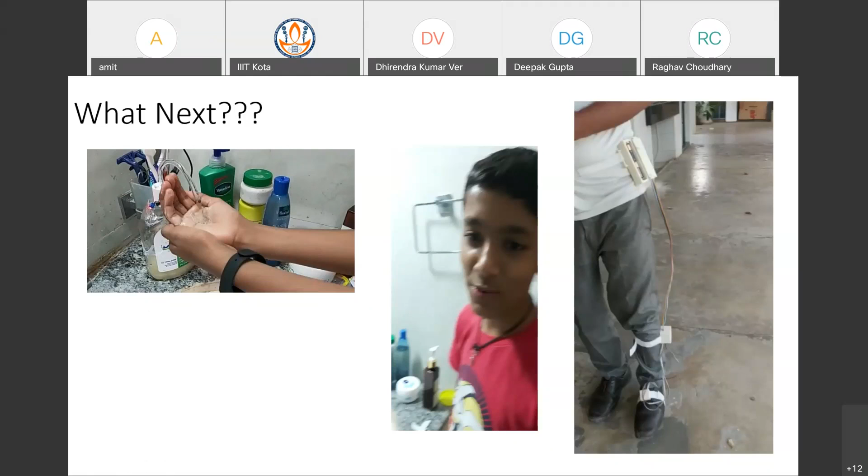The point I was trying to make is that you can see a very simple system we had been talking about, this hand-free sanitizer dispenser. Because when you press the sanitizer bottle, it itself gets contaminated as you use it. It's a very simple system, as you see in this video, done by my son. The point is that sensors and actuators range from the hobbyist level, as in this first video, to the third video you'll see, used by a person for research purposes. So how do you actually go about these sensors and actuators?

In the first video we saw, he used all simple stuff: a simple tube, a pen cap, and the sensor placed there. What it does is, as he places his hand in front of the sensor, that is the sensor, and the actuator lies inside the bottle, which is a submersible pump. So there is some form of conversion taking place, the sensor is actually detecting the distance.

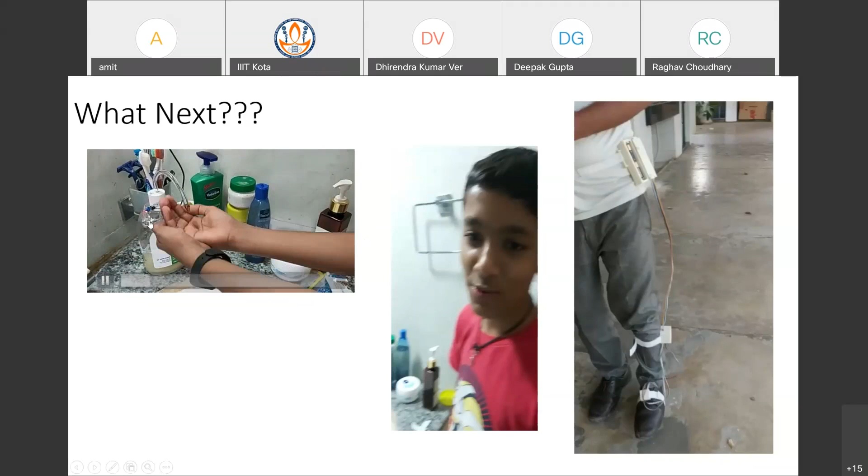So as he places his hand in front of this sensor, it's already activated. As the hand is placed in front of the sensor, it detects this and sends an electrical signal or input to the pump inside the bottle, which converts that electrical signal to an output, that is, pressure. So the electrical signal is converted to mechanical energy, and that's the pressure, and then the liquid starts getting dispensed out of it.

So this was one sensor that he tried. Then he said, of course, like my son, he is studying in 8th standard, so for his age I think that is a good amount of work. So he got interested.

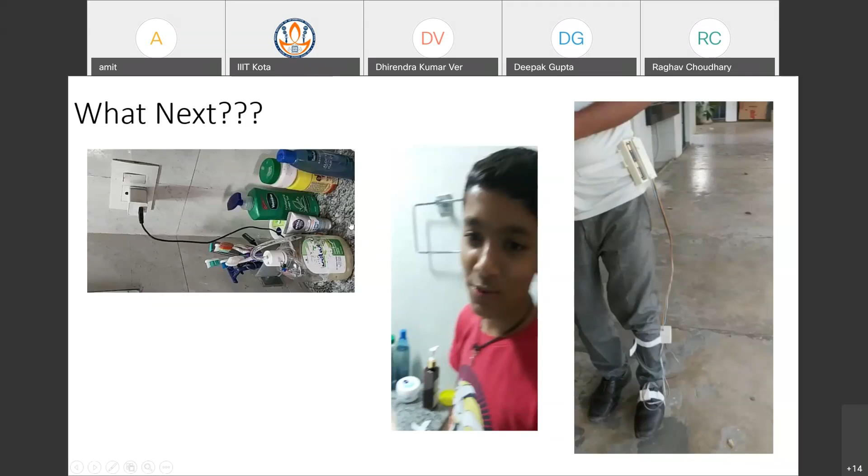He said, let me try some more sensors. So this was the second thing that he tried, and again he's using all the stuff that was placed at home. He used this Pringles bottle and a straw. Again the pump is there inside. So instead of the first sensor you saw, which was an IR sensor,

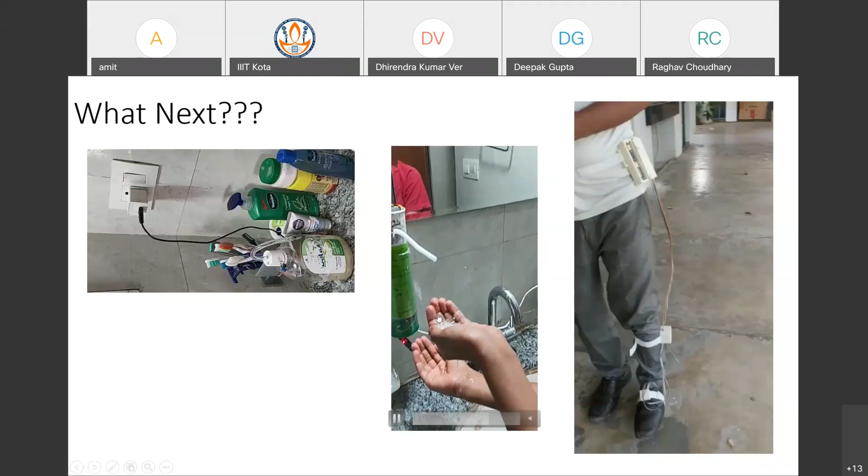here he wanted to use an ultrasonic sensor. But somehow that ultrasonic sensor, it is there with me, I can show you that kit, but that video was not available with me right now.

So you keep on trying with, when I say infrared sensor and ultrasonic sensor, what is the difference? How does it make sense? And then the other thing you have learned in this course is about the Arduino board.

Since this whole program was about LabVIEW, that means you are doing some kind of programming. Of course, these sensors you look at here, they do not use any LabVIEW or any kind of programming like this. But then, we talked about these Arduino boards. So I have one here with me.

Dr. Parikshit, I cannot see myself, what is the visual. I do not know whether what I'm showing is being displayed to everyone. Yes sir, it is getting displayed. This is the Arduino board. Now the question is, Amit sir, I think you can turn on your video also. Is it not on? I think so, start video. It's already giving me the option stop video, so video was already on. Sir, actually video is not on right now, but in my window it shows the video, I can see the camera on. Okay, stop video, and it gives connect to video system. It is just showing that yes symbol, sir. Amit co-host, oh okay, actually it was sharing screen, maybe because of that. So maybe the two things are not allowed at the same time. Maybe if you share only this. So I think it doesn't allow to have video and screen sharing both at the same time. I never tried this one, so that's why I was asking. Nevertheless, it's not very important. Shall I click on this join meeting option that comes? I don't know what, I just clicked on join meeting now. Okay, so now is my... to mobile you are joining. Sir, you have joined two times and we are hearing echoes. So just leave from one side, in which you are not the co-host. Okay fine, so better I'll just take this one now. It is coming, sir, now the camera is there and the screen is also there, both are there. Okay fine, thank you, so now I can see myself in this.

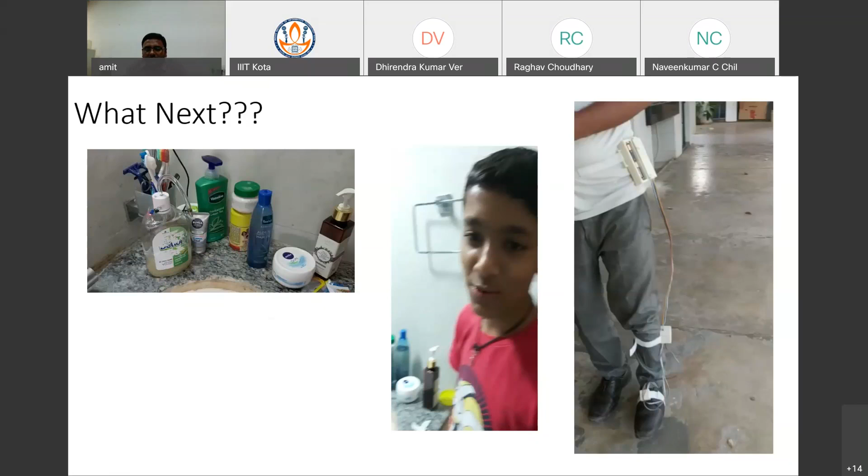I'll explain this later on. So he is Mr. Radhesham Rathore, my PhD scholar. You can see that he's walking with some kind of system latched to his leg.

And I have that system here with me. So then after that, he also had a switch, or he had made a switch for it, and these parts were 3D printed. So this is the complete system, and you can see here.

This is the sole that was placed. I'll repeat the video—so this is a sole, and in the sole we have placed some sensors. We have some sensor in this block that you see over there, and another sensor over here.

So we place a couple of sensors in this whole system, and you can see that he's getting some output on his mobile phone. This is the battery that he's using to power the whole system. He's using a Bluetooth module, and through this module, the output of the sensors is being transferred to his mobile phone.

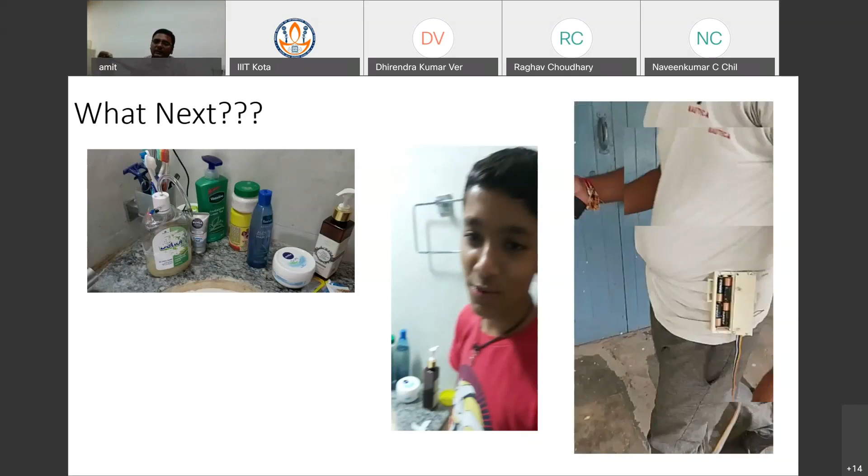So we have placed the sensor inside this - you can see it over there. These are the sensors placed inside the sole. One goal is to get the forces obtained from the ground as the person walks, since these forces are being exerted on the body.

Now if the person's gait is not proper - if he's limping from one side to the other - there would be uneven distribution of forces on the two legs. In this case it's only on one leg. Say the person's weight is around 80 kg, and you want to see what load is being distributed on one limb. So the first part is getting the forces, or the distribution of forces.

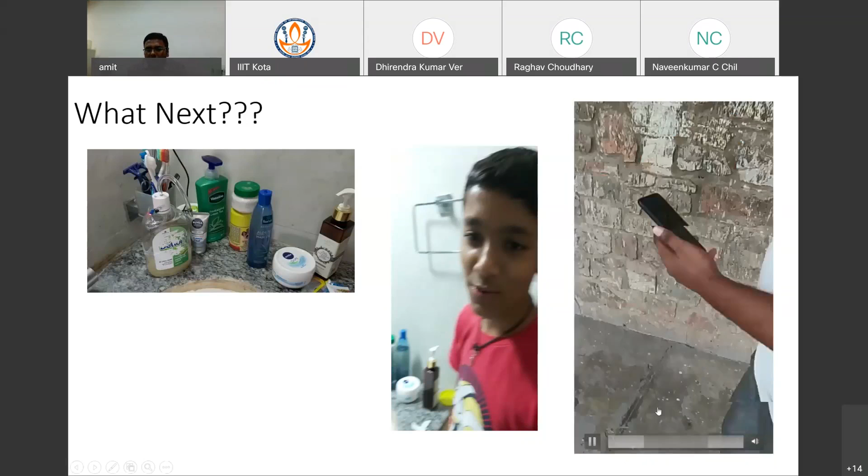Then the second thing is, you had seen the system with something strapped above the shoe. The sole was placed inside the shoe, but there's also a strap arrangement - you see it over there, another strap. So this is like this - you have a sensor in these two straps, and these are nothing but an accelerometer and gyroscope.

These are low cost sensors, ranging from about 300 to 400. The idea was that when the person walks, one thing is about the ground reaction forces. The other thing is that as the person is walking, there would be some trembling - it's not always in a straight position. There may be some tilt in the angle, which we call inversion or eversion.

Similarly, for the knee, we want to see whether it's getting displaced. So the other sensors are measuring the joint angles - if there's displacement of these joints, how much is the displacement, or what is the angle by which it's turned. So in the sole, we place some sensors - these are the Flexi Force sensors.

These are MEMS sensors, so they're very inexpensive. Here we also place accelerometers and gyroscopes, which together form the inertial measurement unit, basically used to get the joint angles. So we are talking about two things - forces and angles - and we are measuring both.

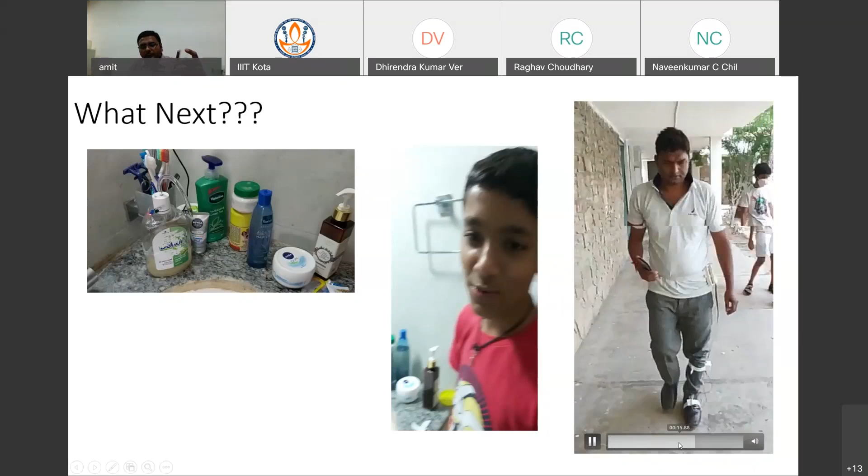So you can see some values being displayed, right? You can see the values being displayed on the phone. These values are nothing but whatever measurements we want to take - the reaction forces and the joint angles that we are talking about. So we are getting all those values.

Now, how do we connect this to whatever we are doing here? That's what I started - what next? So you have done this LabVIEW, and now the problem for this data that I am acquiring from this complete setup is that it is giving me continuous data. So if I want to time this data, I do not want that, because this whole thing would become a big Excel file.

I really do not require this data continuously. So if I want to program this, I need to decide the time interval after which I want to obtain this data. I can do all this with the programming that you have seen or that you have done - even go for advancing, do signal conditioning, and program it.

So in this particular case, the other objective is that I do not want this data to be continuous. I need it at certain time intervals, or it is something like when the person places his feet, there is some time lag. So how do I obtain that thing in that manner? That is the whole idea about this work, or whatever I was trying to display over here.

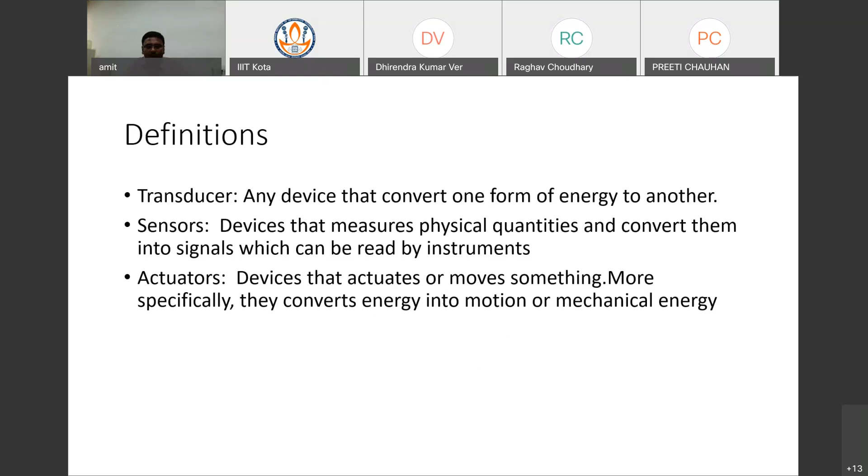Whereas sensors, it is the opposite. Here you are getting the physical input, the distance was the input, or a physical quantity, and it converts it into the electrical quantity.

So if we look at a general classification of sensors, one way is internal and external sensors. Since we deal with something related to biomechanics, I'd like to mention that even our human body has a lot of sensors. For example, external sensors - you all know the sense of smell, touch, or even vision. Eyes are also a sensor. So an external sensor is one that interacts with the external environment or the physical world.

Whereas there are certain sensors which are necessary for the working, but do not interact with the physical world - these are internal sensors. For example, if you place your hand on something hot, you get that signal through your sense of touch, and it sends a signal. That is interacting with the external environment - you get some input and it works on it. That is an example of an external sensor.

However, if you look at something like your pulse or blood pressure, there is no interaction with the external environment. For your heartbeat or pulse, there is no interaction with the external environment, but that is still a kind of sensor. The pulse is also a sensor in a way, as the pulse changes. This internal sensor - unless you have proper blood pressure or pulse rate - it is essential for the survival of the human body. So in the same way we talk about sensors.

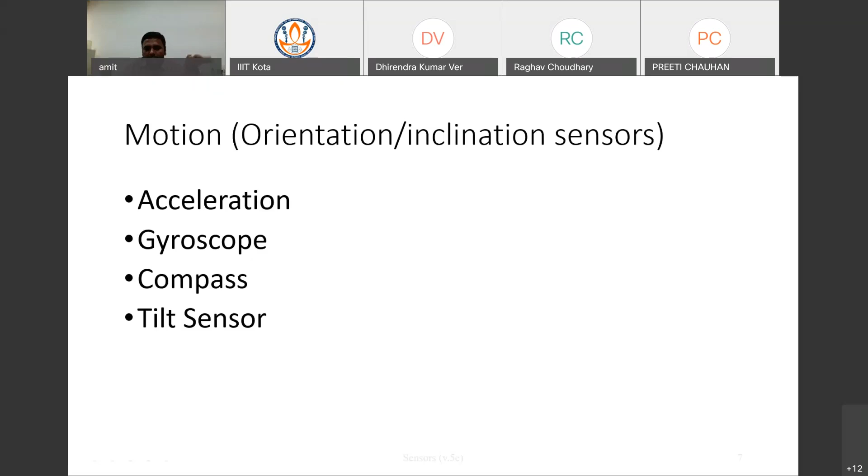Talking about motion sensors for orientation, here we have acceleration, gyroscope, compass, and tilt sensor. The unit that you saw in the third video, that research work we were doing, uses a combination of the first, second, and fourth one. I'll show you some more videos for this accelerometer and this one.

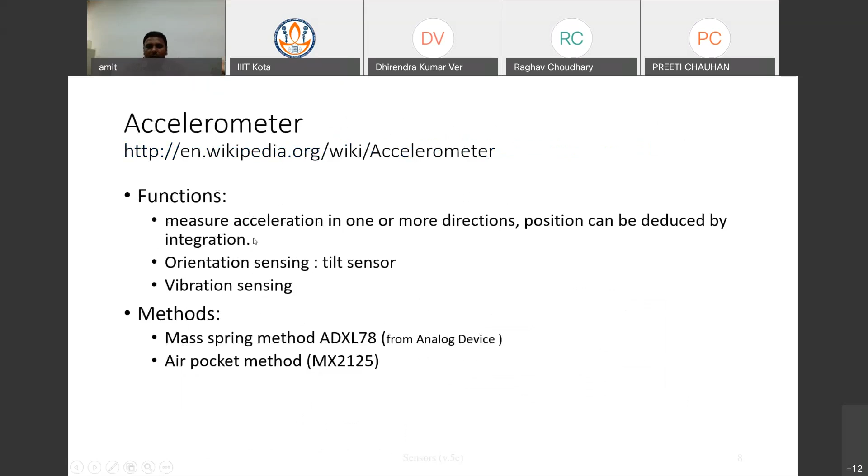When we talk about the accelerometer, you can have an industrial grade sensor costing around 1 lakh, or something that comes for say 700 or 800 rupees. The one that we use is a MEMS based accelerometer, which was available at a very low price. Let me show you.

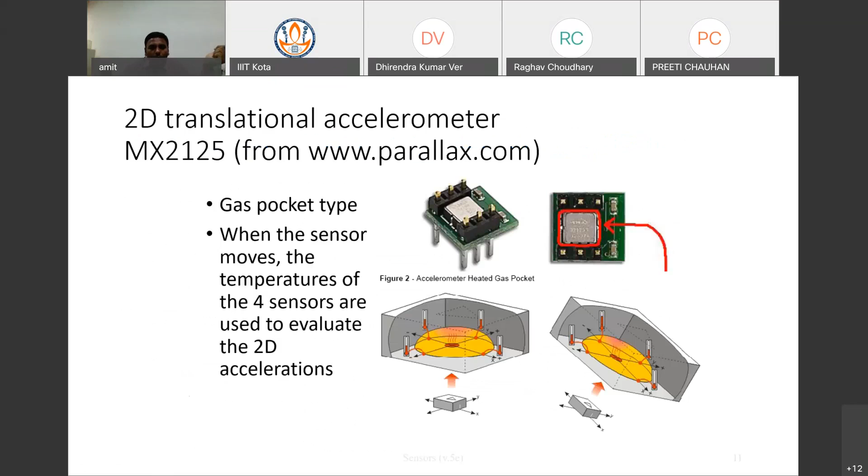This is how an accelerometer would look like. Okay, I'll play this video. Just give me a second, I'm trying to play some videos I could have downloaded over there.

Sir, even the airbag opening system in the car uses that MEMS system, right sir? Yeah, so the safety airbags also use sensors, MEMS sensors. So again, these are very small and also cost effective.

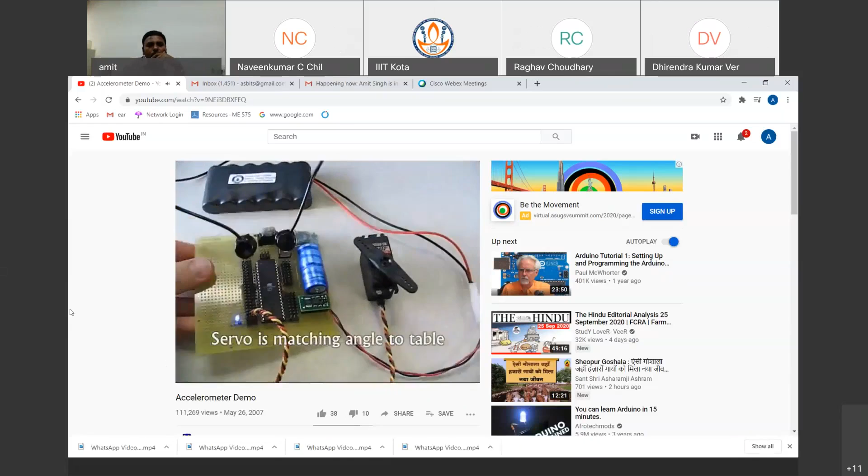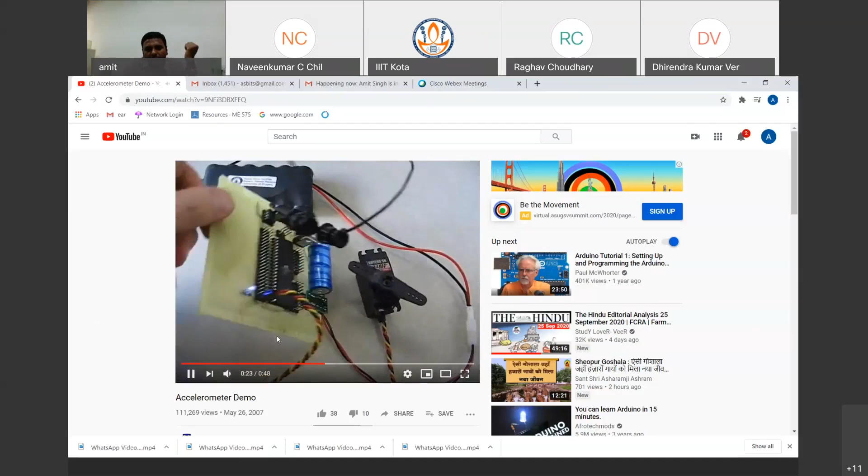So what we are seeing in this video is a plate with a servo motor, and you can see this servo motor being controlled as he is moving and tilting this plate. This is causing or activating this servo motor here.

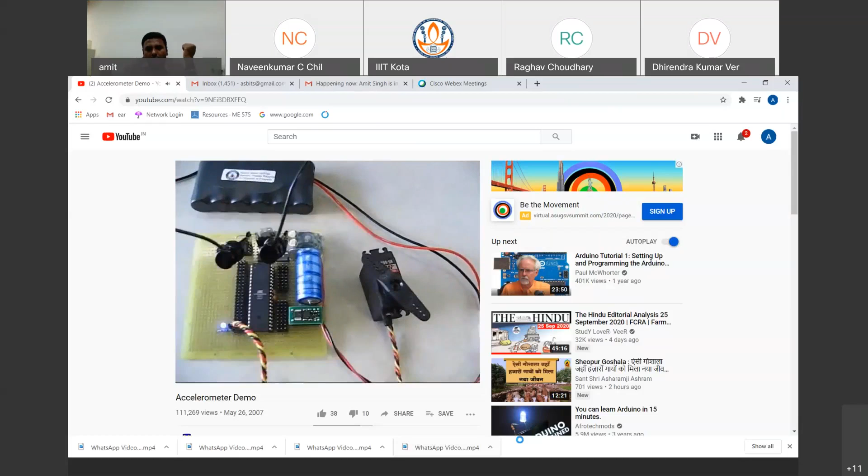So let's look at that, what is actually the use of these sensors. This one was a simple one, so let me show the other one, which gives a...

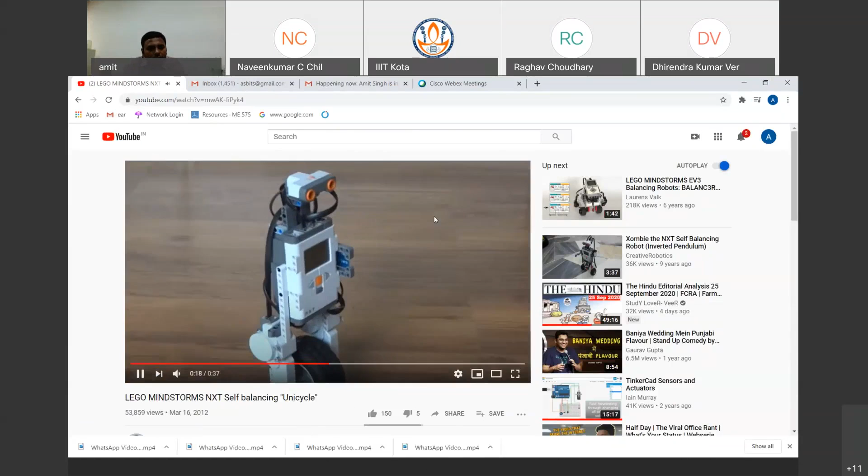Sir, actually, how is it maintaining that vertical position, sir?

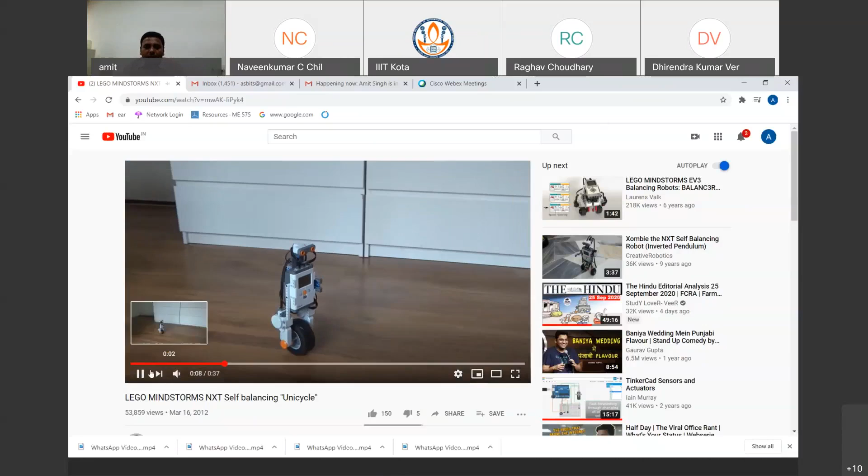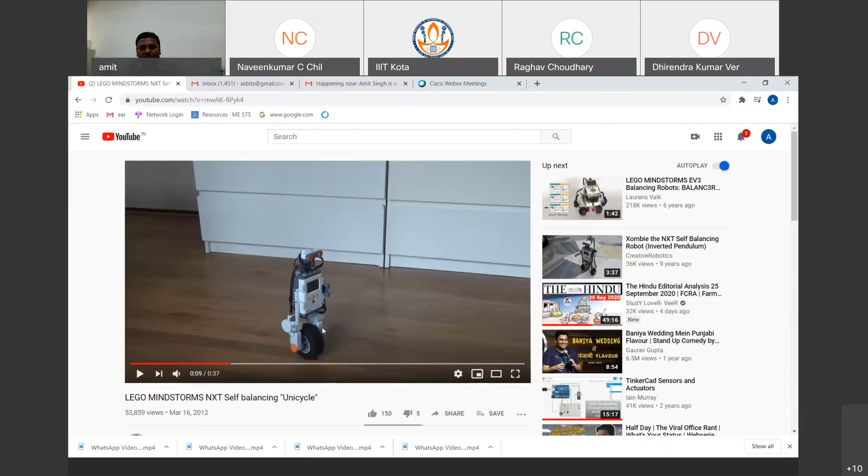Yeah, so this is what we wanted to discuss here. Earlier I had shown a system with an accelerometer and a gyroscope, the same inertial measurement unit. This is being used in the video we saw, which is why it's called self-balancing. It uses the accelerometer and gyroscope because we are talking about forces and angle or rotation. So this sensor detects as it becomes unbalanced, and accordingly gives input to the control, and there is feedback, and it takes corrective action. The idea was we were talking about these inertial sensors: the tilt sensor, accelerometer, and gyroscope.

The gyroscope measures the rotational angle, or the angle of the turn. The accelerometer deals with acceleration or motion. These are working in tandem together as an IMU, trying to balance this robot. I've seen that this robot is actually on a single wheel, so otherwise it's not possible to balance it like this. The whole system is trying to balance this together.

Then similarly, we have something like tilt sensing. Let me just quickly play that part.

Hello, today we'll be showing the limitations of the accelerometer on the iPhone. To do this, we'll be using a free application called 3D Accelerometer by iPad Studios. First, let's show what the iPhone does do well. Let's start with the shake. Using the accelerometer, you can see the red dot moving, and it can be captured easily by developers. Secondly, the tilt or flip is also detected well using angular movement. Unfortunately, the iPhone cannot detect linear movement. When the iPhone is moved slowly in any direction, notice the red dot does not move. This limits the developer's use of the iPhone, and as a result, the user experience.

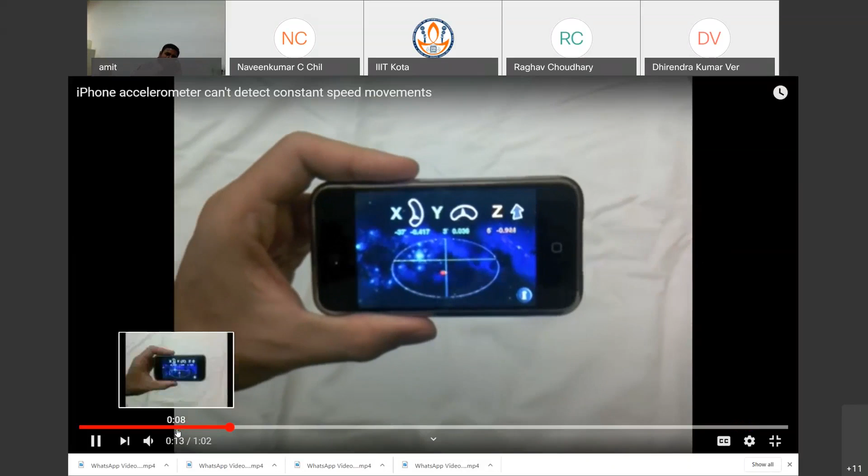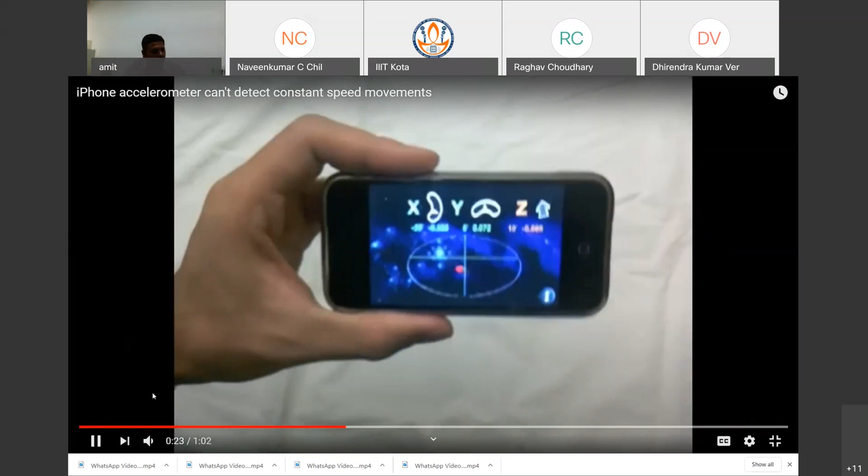On the iPhone, to do this, we will be using a free application called 3D Accelerometer by iPad Studios. First, let's show what the iPhone does do well. Let's start with the shake. Using the accelerometer, you can see the red dot moving and can be captured easily by developers. Secondly, the tilt or flip is also detected well using angular movement. Unfortunately, the iPhone cannot detect linear movement. When the iPhone is moved slowly in any direction, notice the red dot does not move.

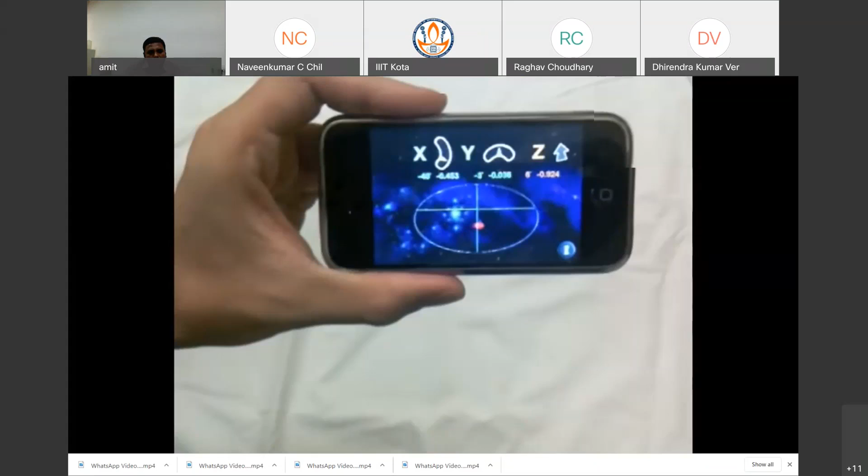This limits the developer. Okay, so in this video, basically what we are trying to say is it is showing the limitation of the iPhone if you look at this red dot. It says that as you have linear movement, there is no movement of this red dot, so that is the limitation, the use of the iPhone, and as a result, the user experience.

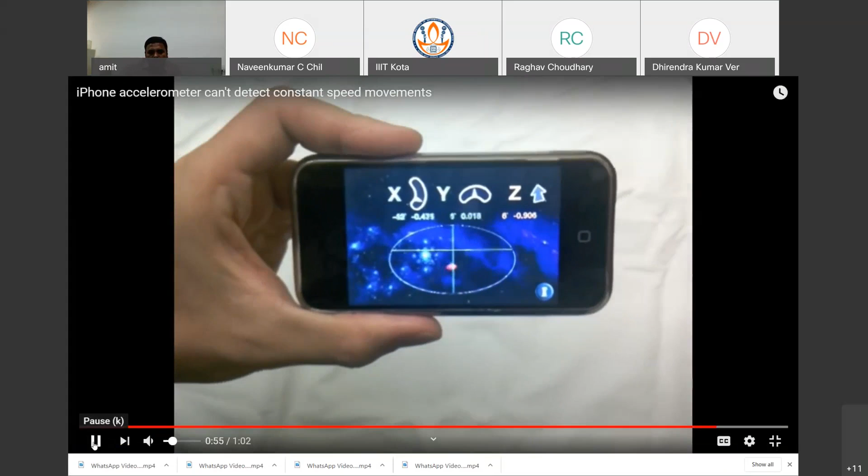Okay, so I think now you can see the presentation back, right? Am I audible? Yes, sir. Okay, fine. So, as the presentation, you can see it. Now again, let's switch to PowerPoint. Yes, sir, accelerometer demo. Pardon? Sorry, accelerometer demo. Yeah, we can see the presentation. Fine. Okay, thank you.

So that's what we were talking about. The whole thing was using accelerometers and gyroscope, and we said we need some combination of forces and rotational angles. This is what this inertial measurement unit, together with accelerometers and gyroscope, is doing. So we are measuring this change in angles along x, y, and z. And this is how it works.

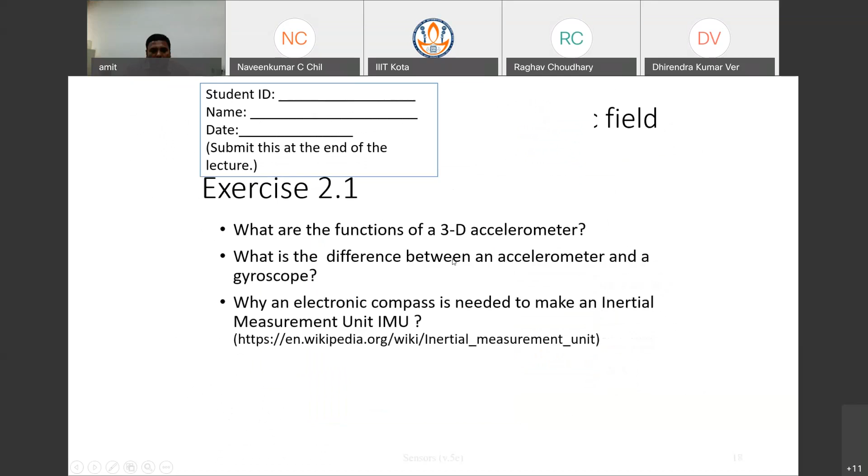So I'm not going into the complete details of all these parts. This is rather more of an introduction to you, showing how we can use these sensors for different applications.

Okay, yeah. Then the next part is another interesting video. I'll not play the complete video, but quickly we can share this so that you understand what is the next thing after this. So we have seen how we are using these sensors, and then we are using signal conditioning. So how do we use that further to improve our system?

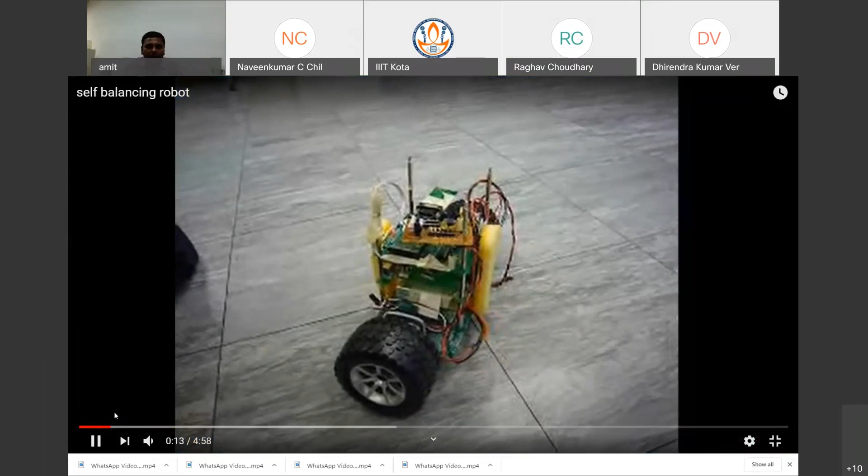Is the browser and this video visible now? Not yet, sir. Can you see the video? No, sir. Okay, now it should be fine. So now you can see, right? Yes, sir. So I'll take it from the beginning.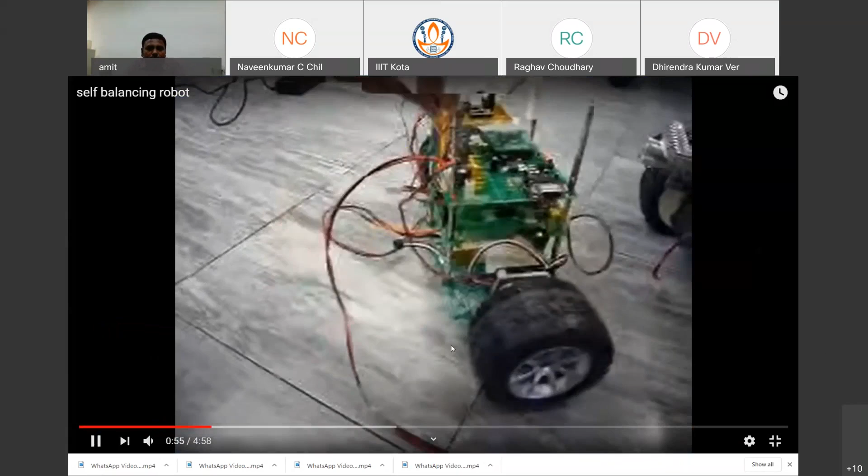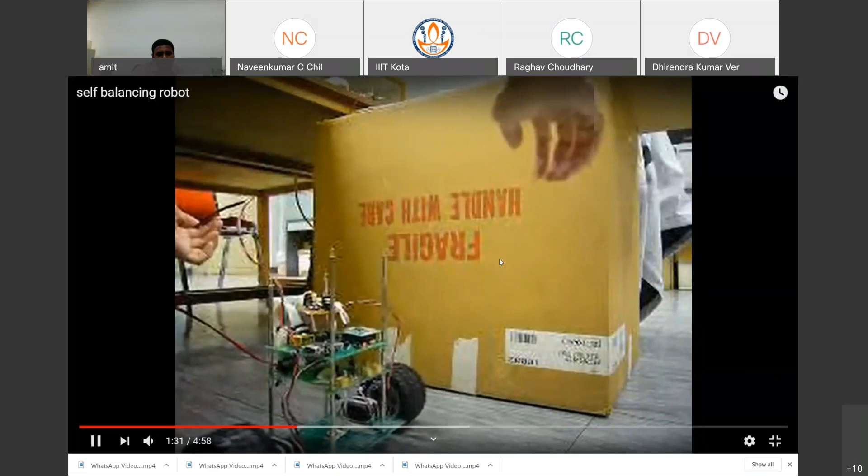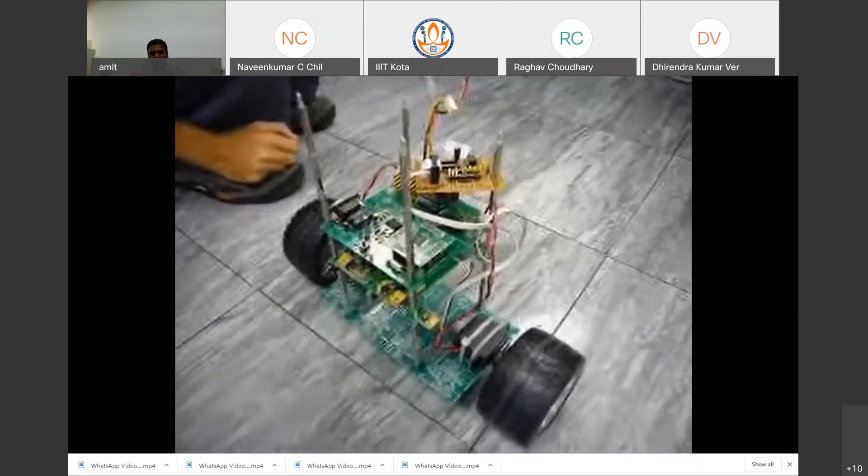So what we are looking at is how we can improve or build upon the system. Then he uses another filter, the Kalman filter. So initially it was just accelerometer. Now this is accelerometer, gyroscope, and filter. So it has good stability.

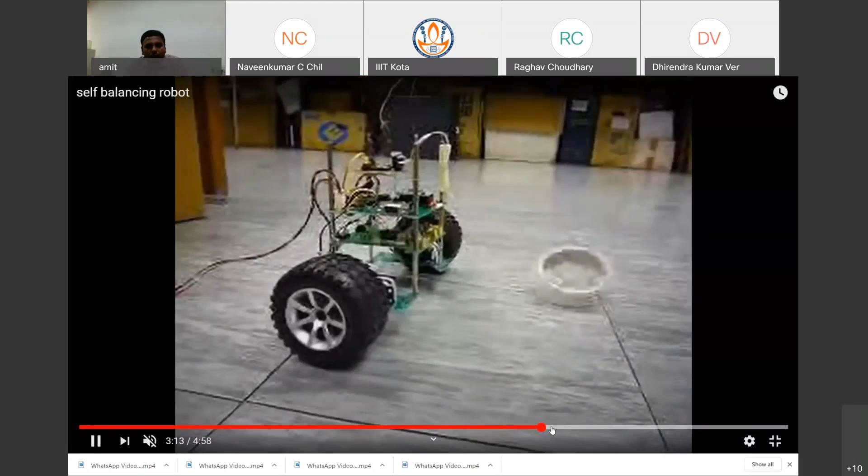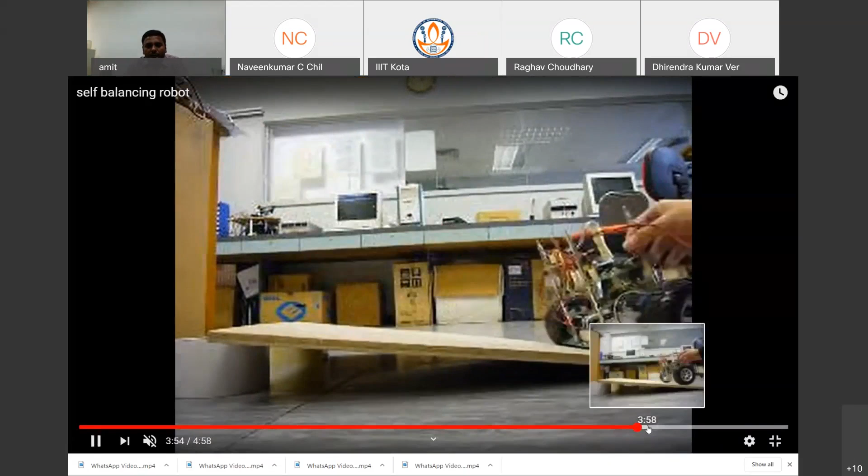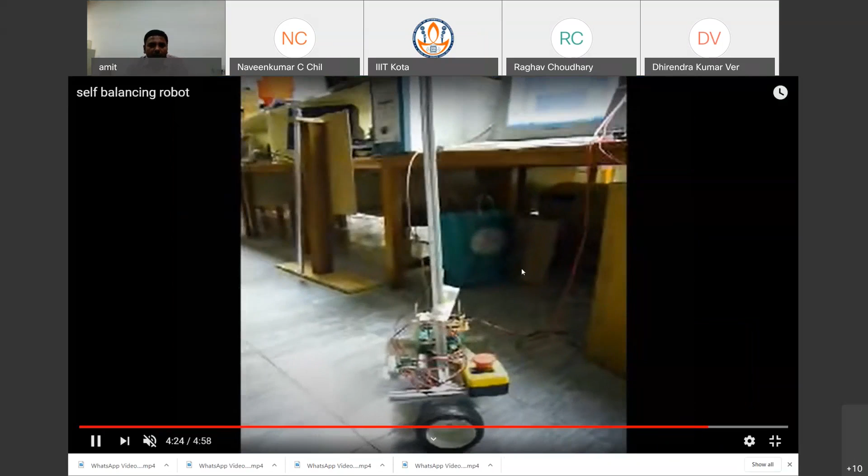So then this is the fourth approach, using another filter, the complementary filter. You can see this is able to climb a ramp using this system. Then finally they have made a larger system, so there is more weight onto this robot.

Okay, so that was about this demonstration. So now let me come back to the presentation.

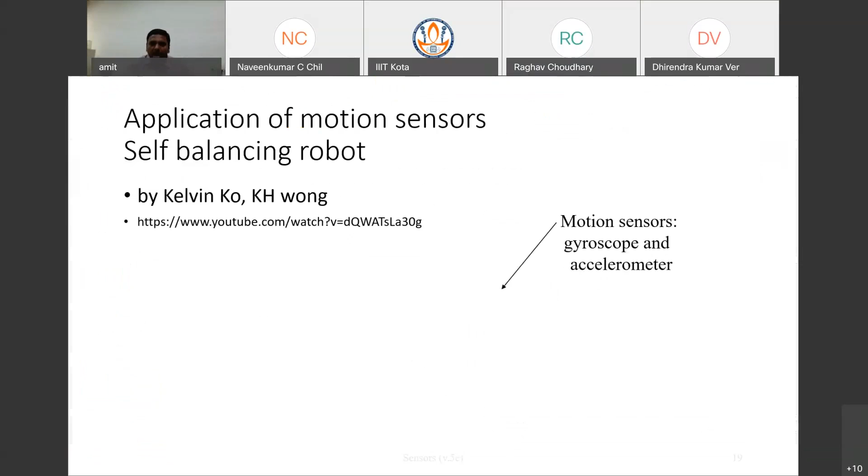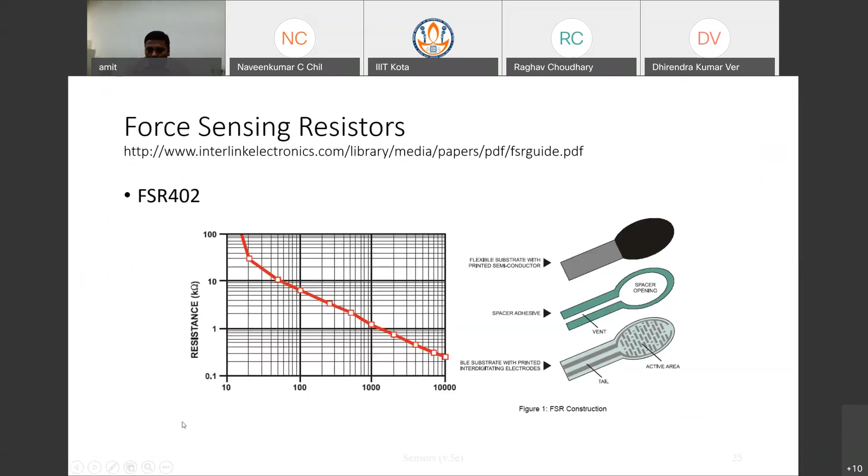So you had seen in the previous demonstration how, when we use some of these filters, what effect it has, or how we can improve the existing system. Just to add on, the first part was we were looking at one kind of sensors, motion sensors. Then you have other kinds, like force resisting or force sensing resistors. This is something like the system that I showed, combining both the force sensor as well as the accelerometer and gyroscope. So we've done this combination of all this, and what is the next step?

As you can see, when we have these kinds of sensors, when working on some kind of robotic system or exoskeletons, if you have this basic idea of how to use this knowledge to improve the existing system, that is really going to be a great help. That's what actually is required from us, that we use the theoretical background.

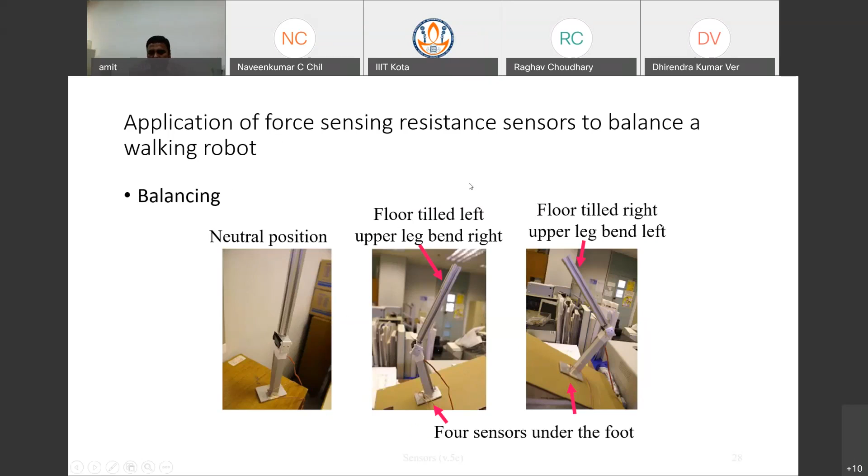When you go ahead with any of this as a hobby, when doing these projects, it has to be step by step. You keep on implementing, come up with some system first, and then look at how this system can be improved further. As I was showing in the previous thing, that is how the system that we developed.

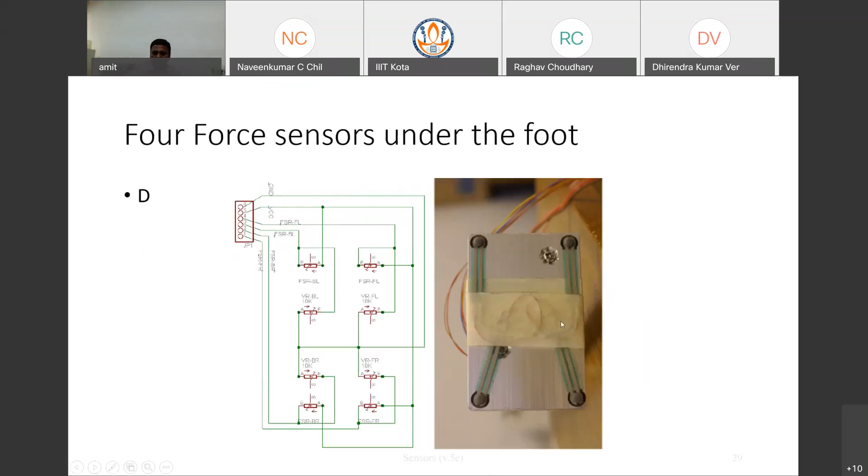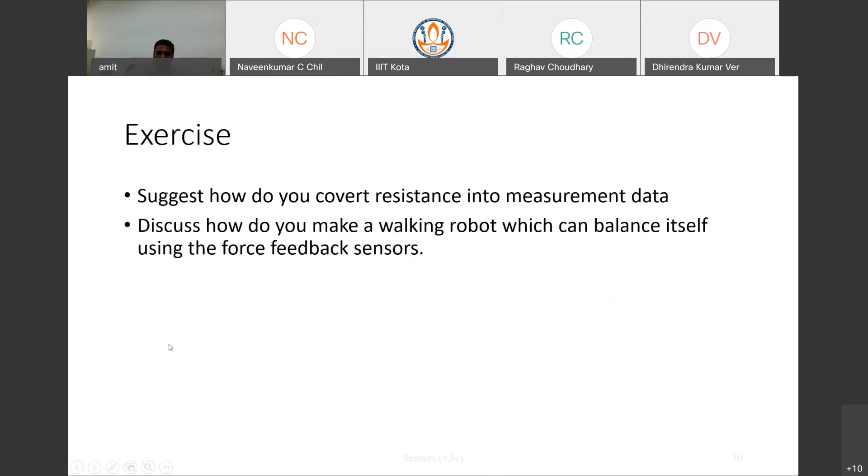So we can use a Bluetooth module, and then how we can improve the data acquisition part of that. This is just for your understanding, if you can reflect upon this - you had seen that this was the force sensor. Basically these are the force sensors which we have used in this particular arrangement. So the point here is how we can convert the resistance into measurement data. If you are talking about a self-balancing system or a walking robot that balances itself, how do you use the force feedback sensors? Again, it's not a test here, but you can reflect on these questions.

So this video and slides will be there. You can go later on and watch the other videos. That was the kind of sensor that we were talking about for the force sensor.

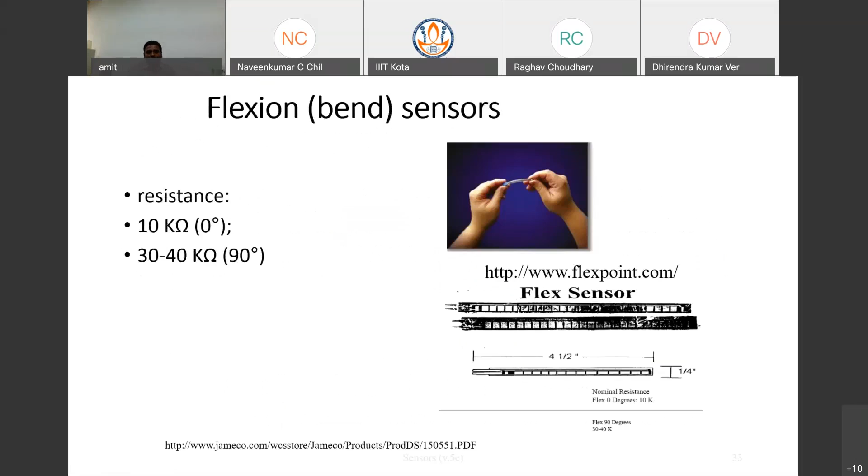So now quickly, I have another 5 minutes because the session was to be till 11 o'clock, so I'll just quickly go through. First part we were talking about sensors, then some kind of data handling system, and then some actuators. When we look at this data handling system, we are talking about the physical world, and both data about the physical world and control signals sent to interact with the physical world are typically analog.

So we understand these are continuously varying quantities. Now, if you have to use something for digital electronics, you have to convert this from analog to digital form for experimental measurement, and convert from digital to analog form on the output end. So when we talk about data collection, there is a measurement of a physical variable, then ADC (analog to digital conversion), then digital to analog conversion, and finally the control of the physical variables. So if you're talking about a power plant with a loop, you take a measurement on that input, convert it to some form, and then control that physical variable.

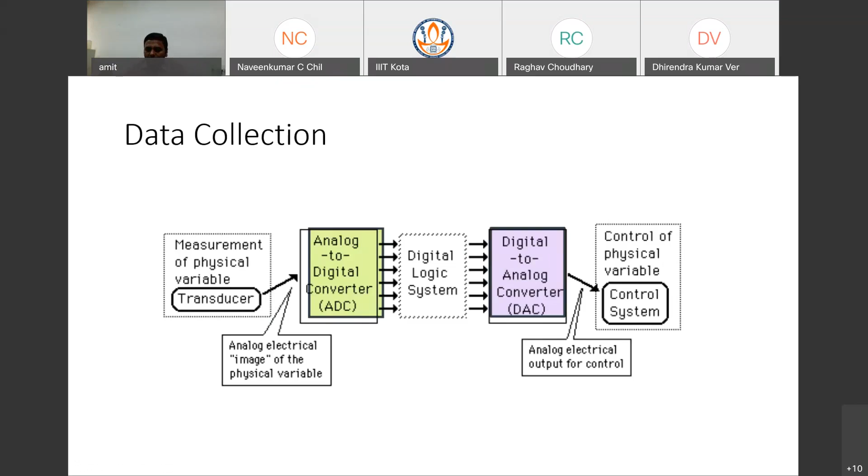About the basics: what is sampling, quantization, and encoding. We want to convert the continuous signal into a series of discrete analog signals at periodic intervals, and then quantize this at some sampling rate. Each discrete analog value is converted into one of a finite number of discrete amplitude levels. Then in encoding, the discrete amplitude levels are converted into a digital code.

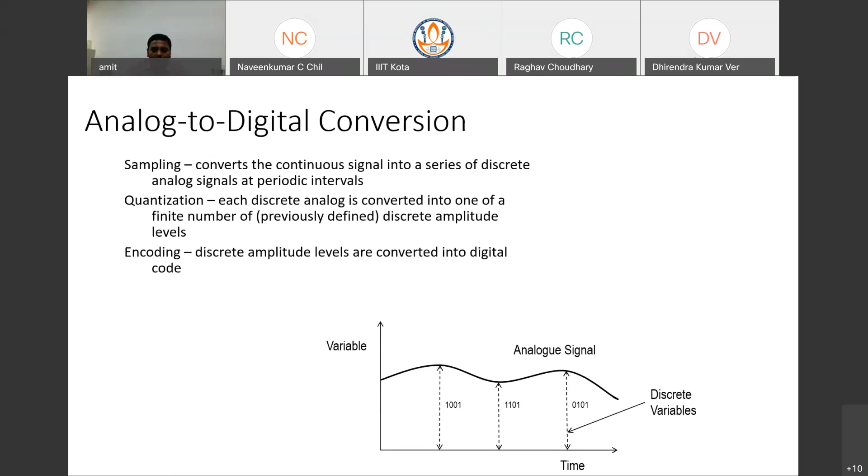So that is something you have dealt with extensively in the coursework.

Just to complete this discussion about sensors and actuators - we discussed one kind of transducer, the sensor. Then we looked at data measurement or handling, how to go about it, and then we talk about actuators. As I said, the actuator is the reverse, here we are changing physical quantities. So it's like a servo motor - it gets an electrical input and converts it into mechanical form. So the actuator is a transducer that again changes one type of physical quantity into the physical form.

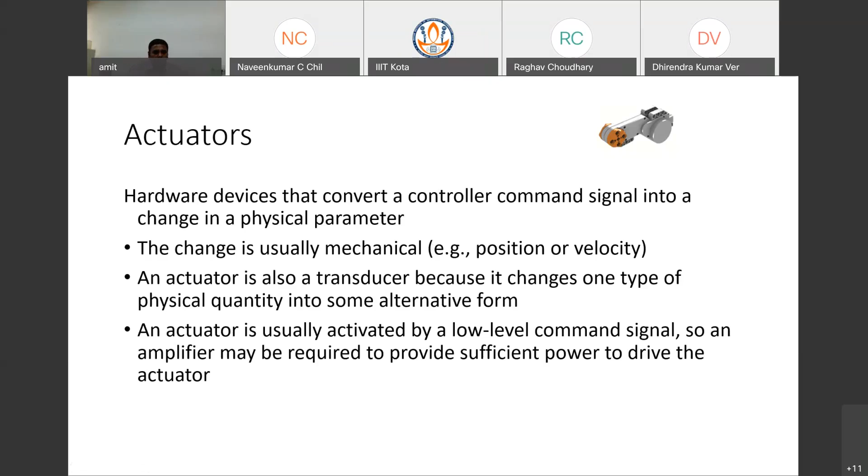This is one last concluding slide here, comparing the open loop system and a closed loop system. Here we have a sensor and an actuator, and a feedback signal also being added to this. That takes us to another part of the discussion, when we talk about control.

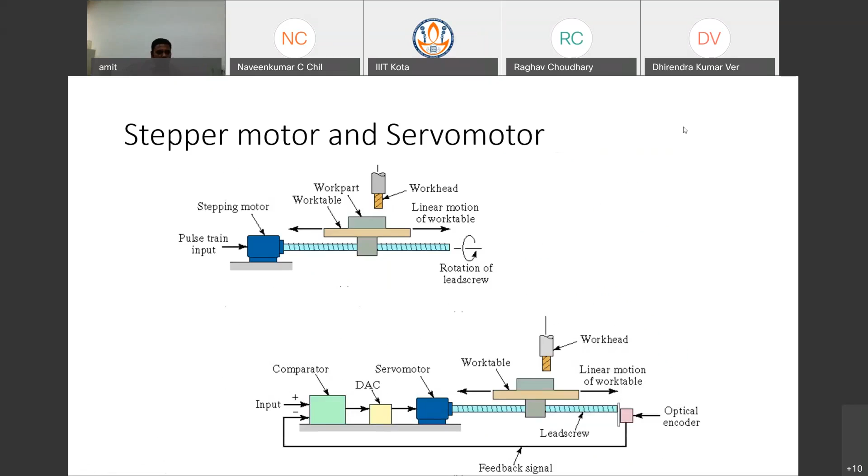Basically that was to be used on some kind of artificial limb that we have developed. We were looking at how we use these sensors to capture the data, which would be used for some kind of mathematical modeling, or for the design - if I have to design an artificial limb, how do I use this force and signal data.

So the question here is, I have those sensors, and how do I actually refine them, because whatever I may be getting may not be very accurate. So how do I focus on the accuracy part? As I say, as a mechanical engineer, this is not my forte. I don't know much about all this, but again, we are just trying to get things from here and there, and trying to put it together so that ultimately you should be able to do something.

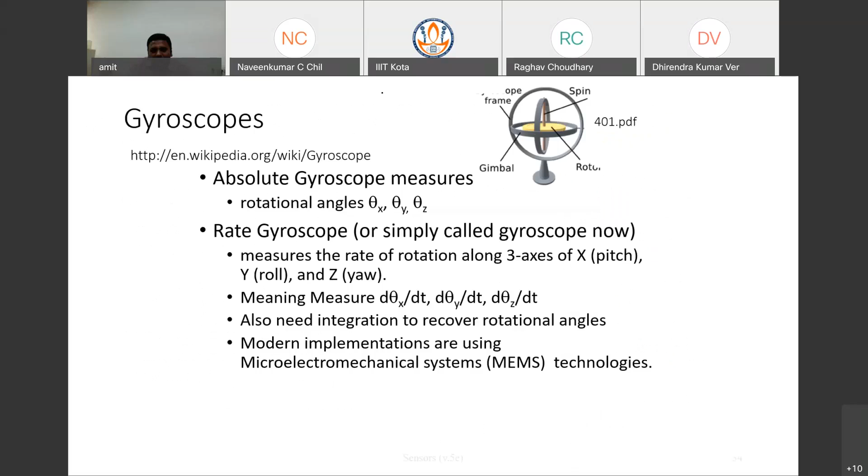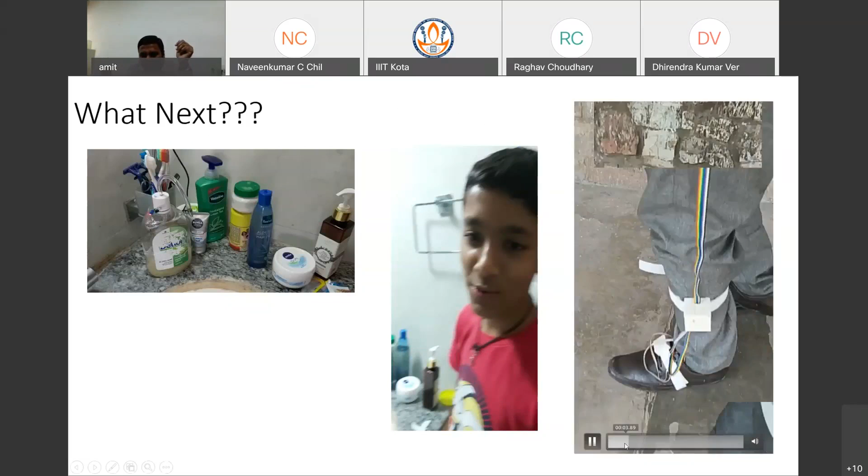So if I go through this thing, basically there are accelerometers, and first is the foot part. So here it is the sole. In the sole we have placed the force sensors or Flexi force sensors, and then in the upper part, if you see over there, so you have something here as well. So here we have used the accelerometer. That is basically for the angle measurement. So the upper part we are using this.

Yes sir. So this is connected using the Bluetooth module. We are transferring this data to the mobile phone, and then we are getting those forces. It's like you can put it in kg, you can calibrate the sensor. So we want to see what is the distribution on the legs. First part is the reaction force, then the other part is joint angles, that is for the foot and for the knee. So what is the rotation that is taking place?

Right sir, I agree with that. That means I think you are using some gyroscope and accelerometer combination. Yes, okay, so for the angle measurement.

Right, so is it a 6 degree of freedom system you had used here? No, so this is actually, the accelerometer that you get, these could be single axis or triaxial. Of course for the knee one we are using a single axis, though it is a triaxial accelerometer. But for the foot we are using it, both are the triaxial, that is 3 axis. You get rotation along X, Y, and Z.

So for the foot we are using all three, like we call it roll, pitch, and yaw. So this is the roll, then this is the pitch, and then this is the yaw. So these are the 3 rotations we are talking about. One is in this plane, one is in this plane, and one is in this plane. So for roll, pitch, and yaw, this accelerometer captures theta along X, Y, and Z axis. And the other one for the knee, we are capturing data only along one axis.

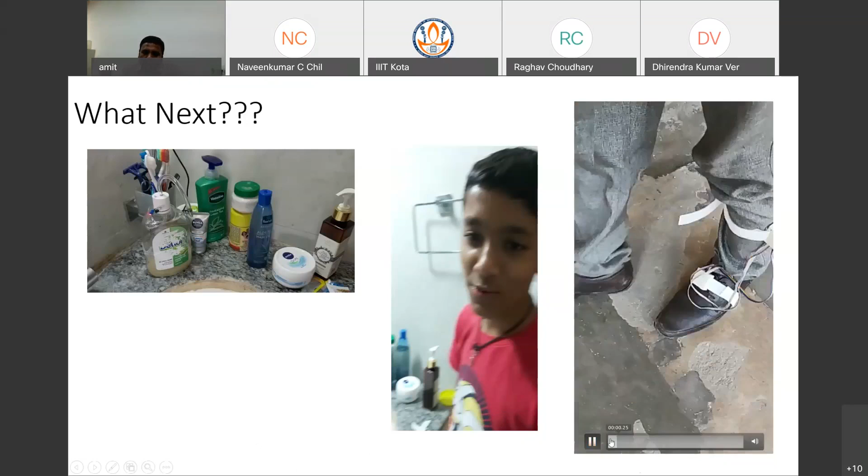When we are talking about this degree of freedom, what I'm referring to is because the accelerometer, that is only 3 degrees of freedom that you are measuring. So it is like at this joint. Now when you are talking about the degrees of freedom, you have the first joint, right? So this is the first joint. Here you have one accelerometer which is measuring roll, pitch and yaw for this joint.

Then you are looking at the second joint, so again this is having another 3 degrees of freedom. So this is like when you say 6 or 9 degrees of freedom, these are for all these joints together. So if I place one more sensor over here at the hip joint, then 3 degrees of freedom for this, 3 for this, 3 for this. So these 9 are from the different sensors. So with one accelerometer, you are using only 3 degrees of freedom, that is 3 rotations XYZ. And as I said, for the knee one we were using only one output, that is only along one rotation we are looking there.

My point was that when you look at this IMU, like I demonstrated in one video, you had seen a red dot tracking on a phone. These have certain blind spots. For linear displacement, that red spot was actually not moving. So there are certain limitations for these IMUs. You can theoretically relate with it and look for some kind of check. As you have a linear displacement of the phone with very slow movement, the dot doesn't move. So you can devise your own way to check when you know something should move, but the output is not being reflected. My point is that it cannot be a foolproof thing that this is good or bad, because that depends on the accuracy. For the sensor we placed, we needed only one kind of rotation for the knee joint. So you should try to come up with your own system to check whether whatever claim is being made is correct or not. You'll have to explore what kind of system to use - get that sensor or IMU, place it on some device, and develop a GUI with some visual. When we were using this gyroscope, we had a simple visual display - when I tilt this sensor, it would show on screen what the rotation is, so I could correlate with that.